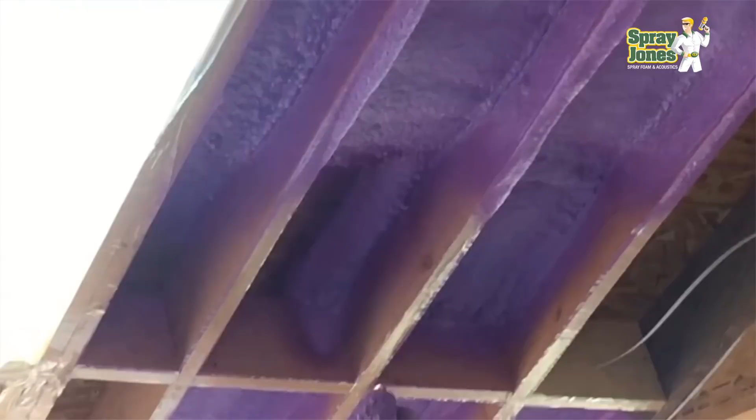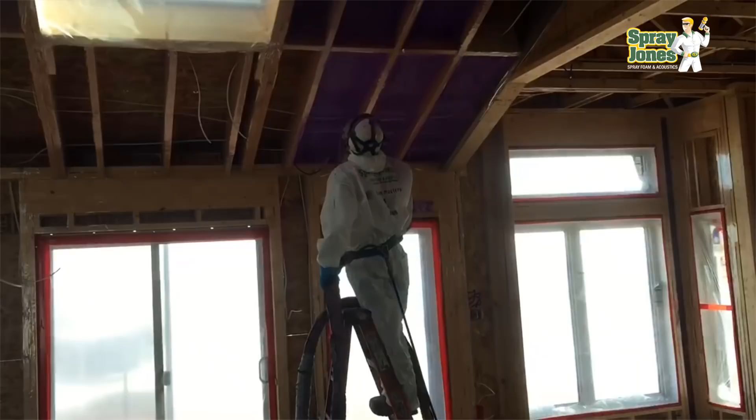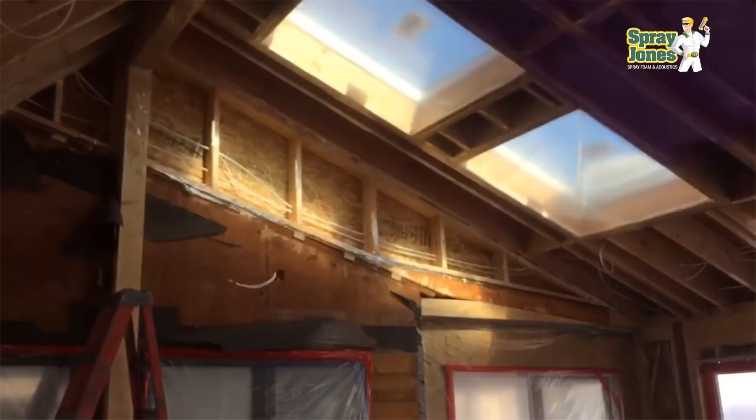So that's what we're here to discuss, and I'll show you as we get deeper and deeper into other products and how foam behaves as to why I'm so convinced that spray polyurethane foam insulation is as modern as tomorrow, and I don't think in my lifetime anything's going to come up that can top what it can do and why. So thank you for tuning in. Let's get into the information.

This information I'm presenting is nothing new. There's a number of other good channels that have engineering and architectural information, and they go over in quite lengthy detail the R value test, so I'm not saying anything new. This has been already described before, and Belinda Carr on her architectural products channel does a very good job and very good video illustration of the R value test, but I'm going to put the Spray Jones sort of spin on it.

So we are dealing with an ASTM C518 test that is conducted at 75 degrees Fahrenheit. And to just cut to how this test is done, let's read what it says on this site here, the test procedure. This test uses a heat flow meter apparatus. The heat flow meter consists of a cold plate and a hot plate, which incorporate heat flux transducers for measuring heat flow. The material to be measured is placed between two plates, which are controlled to different temperatures to create a heat flow from hot to cold plate, which is measured by transducers.

The device is calibrated against materials of known thermal conductivity and can be used to measure flat materials in a wide range of thicknesses and conductivity. Tests are commonly performed with a mean temperature between 35 degrees Fahrenheit and 110 Fahrenheit, with the most common being 75 degrees Fahrenheit. A temperature difference of 40 to 50 degrees Fahrenheit is commonly used. The end result, thermal conductivity or K value and thermal resistance, hence R value, are determined.

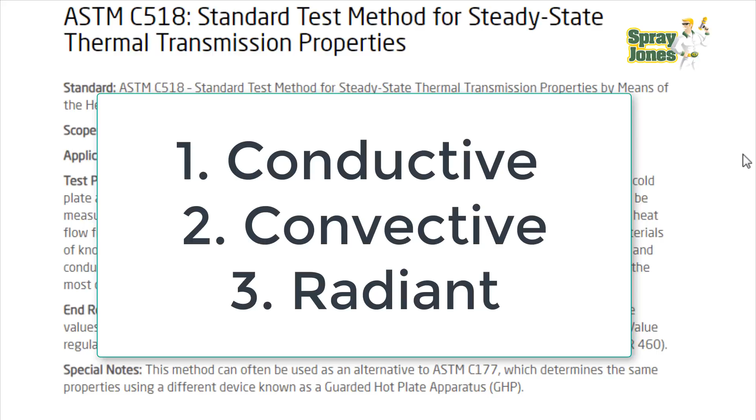If you are going to measure heat loss through conductivity, it needs to be noted here there's three types of heat loss, right? There is conductive, there's convective, and there's radiant. So conductivity is heat loss through touching. So if you are going to set up a test in which you want to measure your insulation's ability to resist conduction, you're not going to want any interference with air movement, which is convection, or radiant values, right? Because that would skew the results.

So you're going to measure one third of the equation, if you can think of it that way, which is what the ASTM C518 test is doing. It's measuring one third of a three-part equation. The problem with that test is if you want your product to fare the best, you have to make sure that it's not going to have any markers that are going to throw it off.

No air movement and no water movement. So the test would be set up that the box would be dry, which it is, 0 water, 0 humidity level, and 0 air movement. So are you starting to see that there's a problem? I mean, if we want to get a pure test on thermal conductivity and resistance value, we're doing the right thing. The problem is we're leaving out 2/3 of the equation in real life.

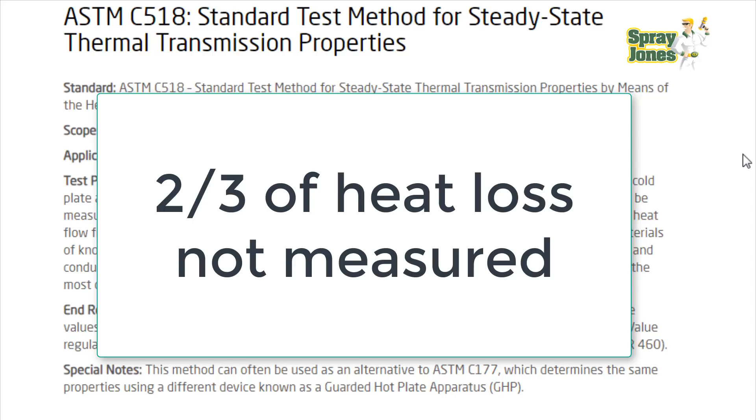So insider information. Everybody wants inside. I believe that you need to take a very good look at what they're trying to accomplish with the test, because there's some very important things that we need to note that's going to have a huge bearing on the decisions that we make. The first is that most samples going into the C518 test are going to be kept at a 1-inch value.

Now, this is the little bit of the conspiracy theorist in me. The fibrous industry, when this test was developed, no input was brought in for other materials. Frankly, a lot of other materials weren't on the market. Fiberglass goes back all the way to 1932, and if you're going to be testing any combination of an open cell fibrous material, whether it's cellulose, mineral fiber, glass fiber, any type of fiber, hay, straw, newspapers, take your pick, you're going to want to minimize the amount of convective loop that you can get inside the material.

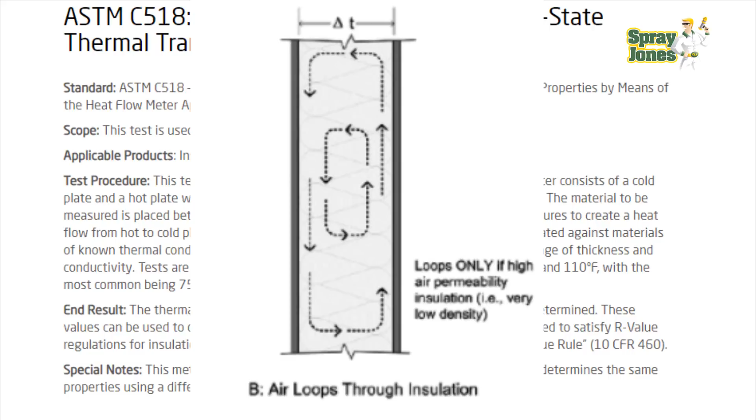So 1/2 inch is going to be too little, 1 inch sounds good, 2 and 3 inches is going to be too thick. If you actually take the insulation material in an open cell fibrous format beyond 1 inch, it doesn't fare as well, because you're going to get more convective loop within the material and it's going to throw out the results. So the optimal result to measure is going to be the 1-inch sample. So that's the first thing that skews our results.

So you're dripping. The sponge becomes saturated, and eventually we reach a point that for every drip that touches the top, 1 drip has to go out the bottom at the drain. We've now reached steady state. And this is when the test begins. There has to be a measurable loss so we can see how conductive our insulation is and how much resistance. If we're giving so much heat or energy here, but only getting so much heat and energy out of the bottom, then we actually have something we can measure.

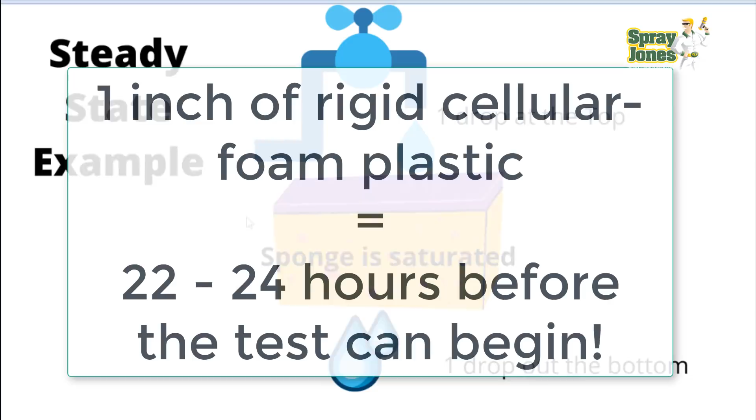Well, what does it take to get through 1 inch of polyurethane foam or 1 inch of EPS? 22 hours. 22 hours minimum. So that's not factored into your insulation equation. So the test is, again, measuring no air movement, no moisture movement.

We have a 1 inch sample so that the fibrous products fare the best as far as internal convective loops throwing off and skewing the results. And the fourth point, we don't start the test until we reach steady state, and steady state data does not factor into our decision.

We only want to measure what the loss value is once we start to get a loss value. So for expanded polystyrene and cork and any type of cellular plastic product that has some sort of gas trapped in the cells, the data is going to be completely different as to how well it's actually working for an insulation, because the test isn't set up to take any of that data into account. So are you starting to see just how rigged this is? This has already moved our needle so far over that to base our decisions on this one test is really going to throw us off.

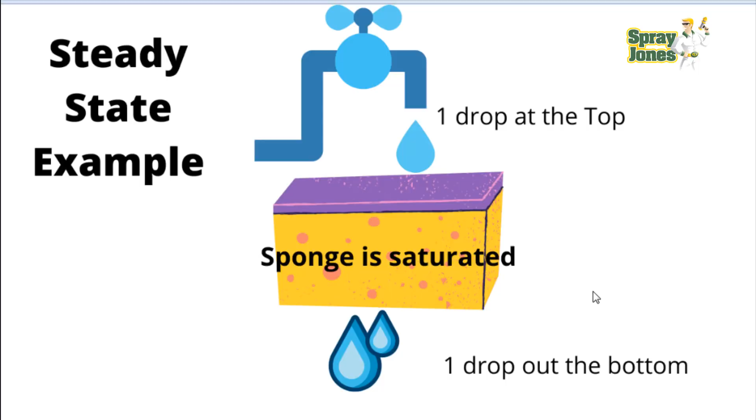So now we're going to get into studying a little bit more on this R value test, conductivity test, and getting into a lot more anecdotal evidence. But let's just pause for a minute and think about the 3 mechanisms of heat loss: conductive, convective, and radiant. So far, this test is only measuring one type.

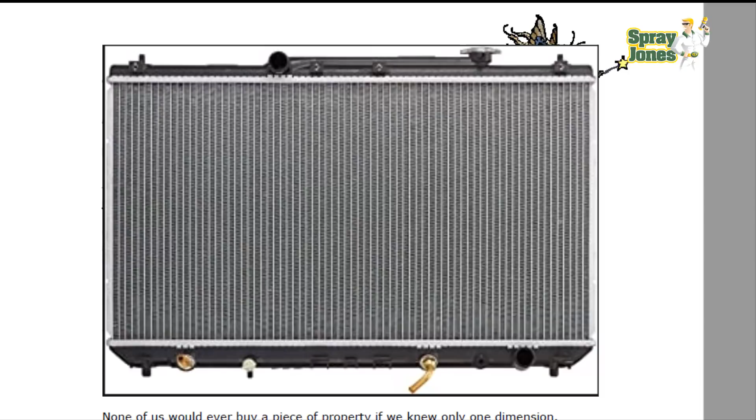Think about a simple thing that we all have if we're driving a vehicle, a radiator in our car. Think about the fact that the radiator is using all 3 mechanisms of heat loss to cool down the coolant which is circulating through the engine block. You have got conductivity in the form of many, many pipes inside the radiator, which is maximizing the surface area, and then fins that go through those pipes to maximize surface area so that there can be maximum conductivity surface area.

We then drive air through the radiator, which is convective, to pick up the radiating heat across the conductive surfaces to cool the entire and transfer the heat from high source to low source, which is going to be the air. The air and the radiant values are dissipating the heat, dissipating the energy. All 3 mechanisms of heat transfer or heat loss are working in a car's radiator.

Now imagine, if you will, that we only would take into account conductive value. Imagine that we took the air out of your radiator. Everybody has had a vehicle at some point overheat that has had the rad plugged, right? You've had dust, dirt, grime in the radiator, and you can't get enough airflow, or the fan quits, or the fan belt quits. Well, how is it that airflow all of a sudden in that radiator shuts you down? Well, massive amount of heat transfer due to the convection. And that's exactly where we're going now, is to understand what is happening in our buildings.

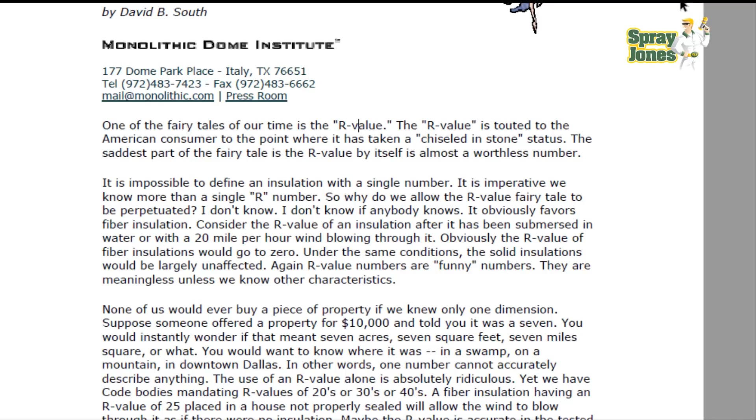One of the fairy tales of our time is the R value. The R value is touted to the American consumer to the point where it has taken a chiseled in stone status. The saddest part of the R fairy tale is the value itself is almost worthless. It is impossible to define an insulation with a single number. It is imperative that we know more than a single R number. So why do we allow the R value fairy tale to be perpetuated? I don't know, if anybody knows. It obviously favors fiber insulation.

Consider the R value of an insulation after it has been submerged in water or with a 20 mile per hour wind blowing through it. Obviously, the R value of fiber insulations would go to 0. Under the same conditions, the solid insulations would be largely unaffected. Again, R value numbers are funny numbers. They are meaningless unless we know other characteristics.

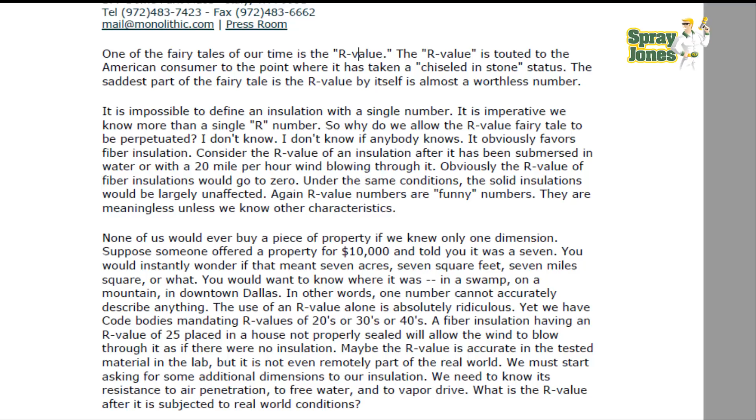Test to determine R value. We've taken a look at this. The test used to produce the K value is an ASTM test. The ASTM test was designed by a committee to give us measurement values that hopefully would be meaningful. A major part of the problem lies in the design of the test.

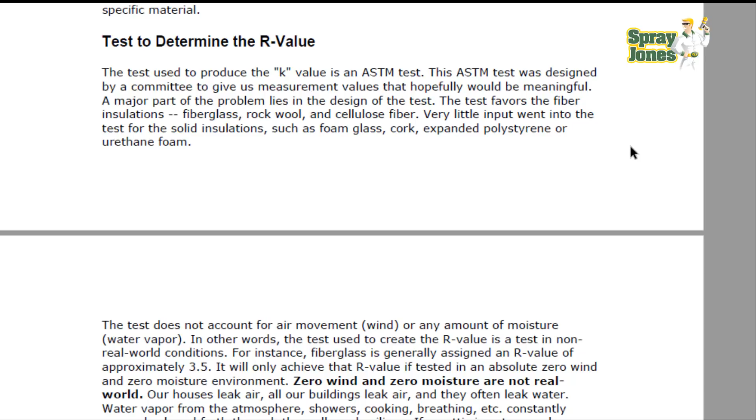The test favors the fiber insulations: fiberglass, rock wool, cellulose fiber. Very little input went into the test for the solid insulations such as foam glass, cork, expanded polystyrene, and urethane foam. The test does not account for air movement, wind, or any amount of moisture, water vapor. In other words, the test used to create the R value is a test of non-real world conditions.

Now, I've said it before, to be fair, if you want to test only for conductivity, the test is set up correctly. All right? That I will give them. But we just cannot allow that one test to factor into our energy codes. But it has.

For instance, fiberglass is generally assigned an R value of approximately 3.5 per inch. He's talking per inch in the sample, which, by the way, an empty air cavity will achieve. It will only achieve that R value if tested in absolute zero wind and zero moisture movement. Zero wind and zero moisture movement are not real world. Our houses leak air, our buildings leak air, and they often leak water.

Water vapor from the atmosphere, showers, cooking, breathing, etc. constantly moves back and forth through the walls and ceilings. If an attic is not properly ventilated, the water vapor from inside the house will very quickly semi-saturate the insulation above the ceiling. Even small amounts of moisture will cause a dramatic drop in fiber insulation's R values, as much as 50% or more.

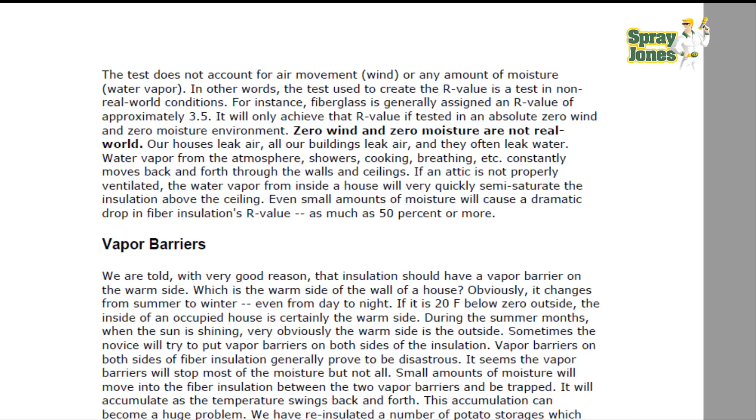Moving a little bit further down in his report here, we understand air penetration through the wall of a house. In some homes, when the wind blows, we often can feel it. But what most people, including many engineers, do not realize is that there are very serious convection currents that occur within the fiber insulations. These convection currents rotate vast amounts of air. The air currents are not fast enough to feel or even measure with any but the most sensitive instruments.

Nevertheless, the air is constantly carrying heat from the underside of the pile of fibers to the top side, letting it escape. If we seal off the air movement, we generally seal in water vapor. The additional water often will condense. This now becomes a source of water for rotting of the structure. The water as a vapor or condensation will seriously decrease the insulation value, the R value. The only way to deal with a fiber insulation is to ventilate. But to ventilate means moving air, which also decreases the R value.

This is going to be huge because the next set of 4 videos coming out is going to be all to do with ventilation, attics, cathedral ceilings, cathedral attics, and spray foam insulation, moving away from old-fashioned methods and what had to be, to new methods and what can be and should be done. I want to say this with what he's just said.

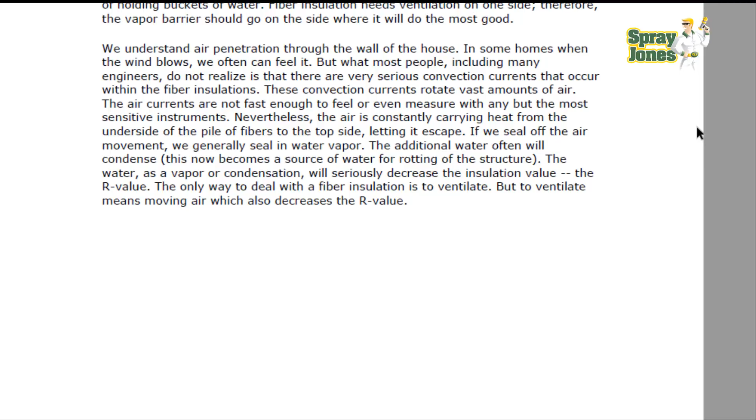Here's a good example that he gives of the attic insulation and the amount of cold, dense air and the warmer air flowing through. We saw this in the study that I showed earlier on flash and batt 2. I brought up the Oak Ridge National Labs attic study, where they started to see just how much cold air was flowing through the attic.

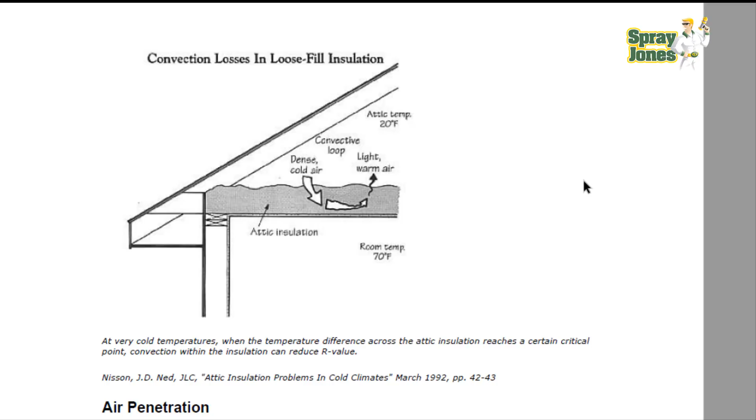Do you understand why attics are done with R40 and R50? It's to make up for this. It's to make up for the amount of cold, dense air that's going through the first 6 to 8 inches of loose fill or batted insulation. You're trying to put more and more insulation between you and the cold side to make up for the air leakage. Shocking.

So we're seeing that air movement through our insulation and water movement through our insulation is hugely detrimental to the insulating ability. So here he states, the only commonly used solid insulation that absolutely protects itself from air infiltration is the spray-in-place polyurethane. When it is properly placed between 2 studs or against the concrete block wall or whatever, the bonding of the spray foam plus the expansion of the material in place will effect a total seal. This total seal is almost impossible to overestimate.

In my opinion, most of the heat loss in the walls of a home have to do with the seal rather than the insulation. Then somebody already made a comment of this, waiting for this video to come out. They think that the air seal is almost more important than the R value. You are correct. In fact, most people cannot understand why we can blow the doors off heating loads with only 1 inch of foam. According to the R value test, we don't have hardly anything there. It's the air seal.

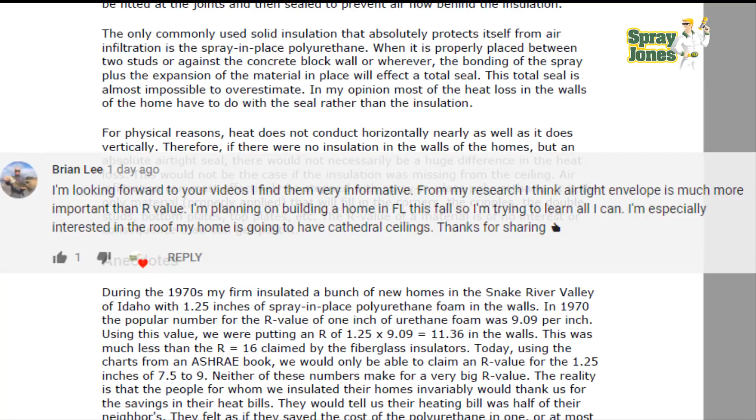For physical reasons, heat does not conduct horizontally nearly as well as it does vertically. Therefore, if there were no insulation in the walls of the homes, but an absolute airtight seal, there would not necessarily be a huge difference in the heating loss. This would not be the case if the insulation was missing from the ceiling.

Air infiltration can most effectively be stopped with spray-in-place polyurethane. It is the only material properly applied that will fill in the corners, the cripples, the double studs, top and bottom plates, etc. The R value of the material is of no interest or consequence if air can get past it. Agreed.

So, having absolutely no way of having your batt insulation airtight to the inside, not to the outside, in a flash and batt situation, you are throwing your money away. The polyurethane foam is what's providing the insulation and protection to your home. The batt insulation is just feel-good information. It's not really actually doing anything there.

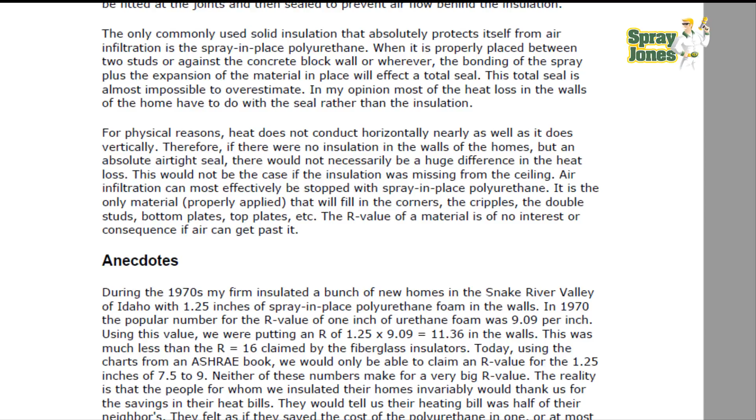Okay, anecdotes. During the 1970s, my firm insulated a bunch of new homes in Snake River Valley of Idaho with 1.25, that's 1¼ inches of spray-in-place polyurethane foam in the walls. In 1970, the most popular number for the R value of 1 inch of urethane foam was 9.09. Do you know why that is? This is a blowing agent.

Before the green environmentalists got a hold of us, we were able to put better chemicals in the product that were amazing insulators. It's only taken them 30 years to make us physically double the amount of material that we have to put into a wall to get the same as what we were getting 30 years ago. That's a whole nother subject.

Using this value, we were putting an R of 1.25 times 9.09 equals 11.36 in the walls. This was much less than the R16 claimed by the fiberglass insulators. Today, using the charts from the ASHRAE book, we would only be able to claim an R value of the 1.25 inches of 7.5 to 9. That's total value, okay? So 1.25 inch, he could only claim somewhere between 7.5 to a total value of 9. Neither of these numbers make for very big R values.

The reality is that people for whom we insulated their homes invariably would thank us for the savings in their heat bills. They would tell us their heating bill was half of their neighbors.

They felt as if they saved the cost of the polyurethane foam in 1 or at most 2 years. This is anecdotal evidence, I know, but anecdotal evidence is also compelling and very real in our world. Most of these customers were savvy people. They would not have paid the extra to get the urethane insulation if it had not been better. So

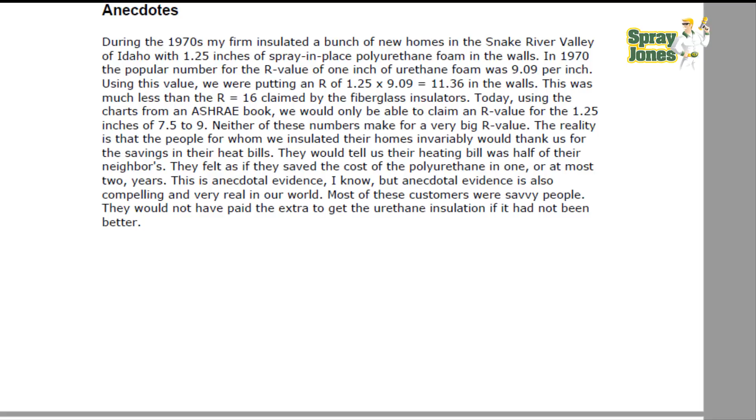how is this possible? How is it possible that we are putting in an R7 or an R9 of spray polyurethane foam in a 2x4 wall, and the heating bills are half as much as in the house receiving the R16 batt? Obviously, the R values are not equal. Obviously, the fiberglass is not giving us a true value. Back to my article: insulation innovation holds promise for true efficiency.

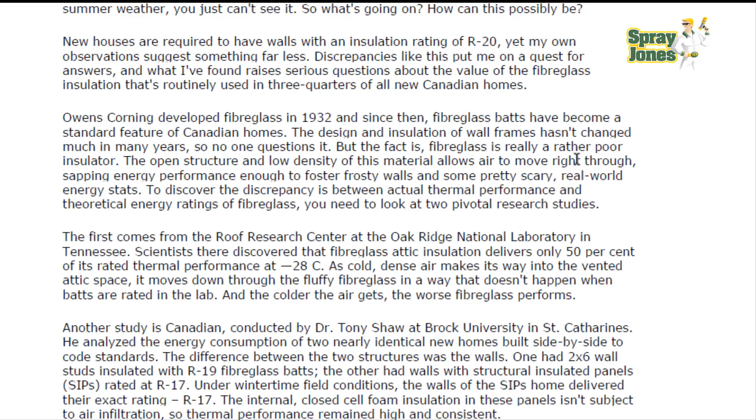So we've already seen this before. I showed this in the flash and batt video. If you want to check it out a little bit more, we're not going to read all of it. We're just going to scroll down here. They built two identical houses, right? Another study is Canadian, conducted by Dr. Tony Shaw of Brock University in St. Catharines. He analyzed the energy consumption of two nearly identical homes built side by side to code standards.

The difference between the two structures was the walls. One had 2x6 wall studs with R19 fiberglass batts. The other had structural insulated panels, or SIPs, rated to R17. So all right, we're underneath. We're R17 to R19. Under wintertime field conditions, the walls of the SIPs home delivered their exact rating of R17. The internal closed cell foam insulation in these panels isn't subject to air infiltration, so thermal performance remained high and

consistent. The walls of the fiberglass insulated stud frame home, on the other hand, performed at an actual level of only R4, because of the inevitable air movement within the hollow wall cavities. Hard to believe, but true. And then he goes on to say you can put all the building wrap, siding, and materials that you want on the outside of the house. The air still wafts through the wall cavities, carrying the energy with it. In the Brock study, the code-built home lost more than 60% more energy than the SIPs panels.

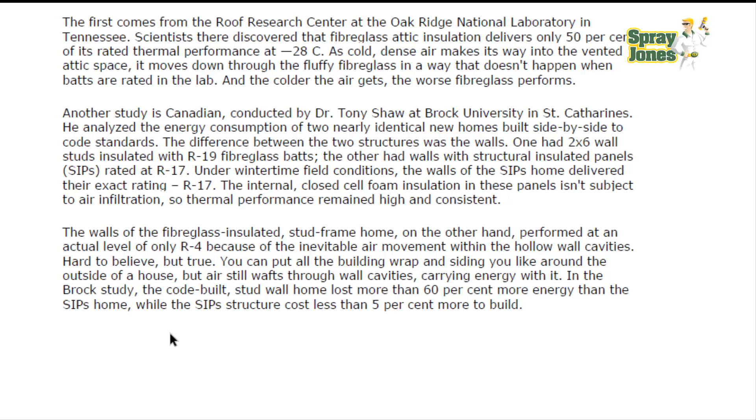All right, what are we saying here? We are saying that the R values are not equal. We're seeing the information in the field. Now, I want you to understand something about the other part of the C518 test. It's a 1-inch sample, but it fits on all four sides. It fits perfectly into the box. It fits perfectly to the lower heat plate and the top plate. There's absolutely no gaps around it or on top of it. So that, again, is the fifth point of not realistic.

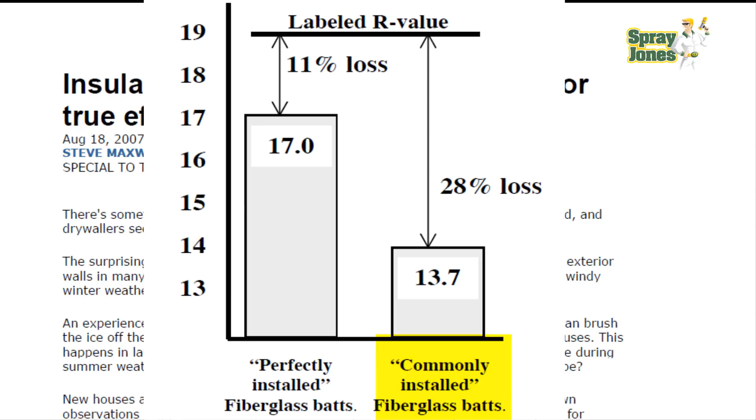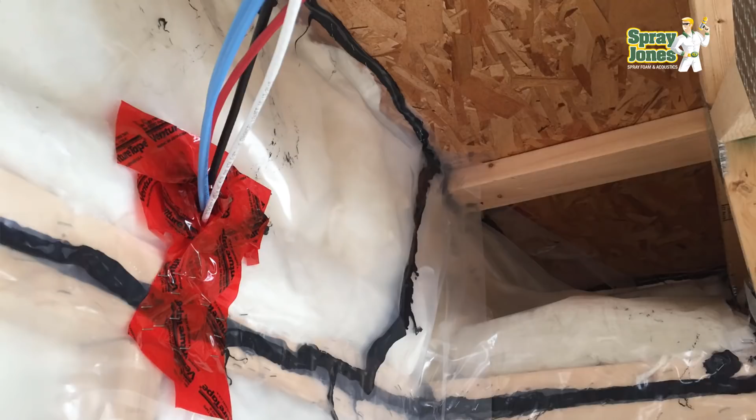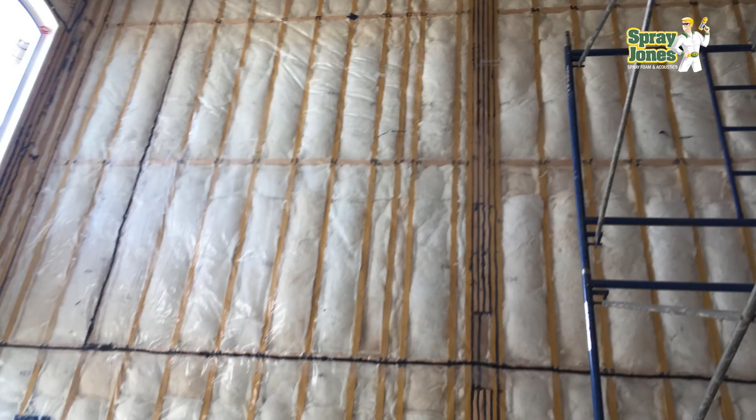Now, again, if you're just wanting a hyper-accurate test for thermal conductivity, we've got it. But don't take the conductivity test without convection, without radiant, without moisture movement, and then say that that's our total assessment for insulating values, right? Now, this favors the fiberglass industry, because they can claim that they've got R20, R30 and 40. The test is slanted. Our football team, the spray foam and foam insulation of any kind, cellular, EPS, it doesn't matter. We show up and they've already got 20 points on the board. We have to overcome a 20-point deficit.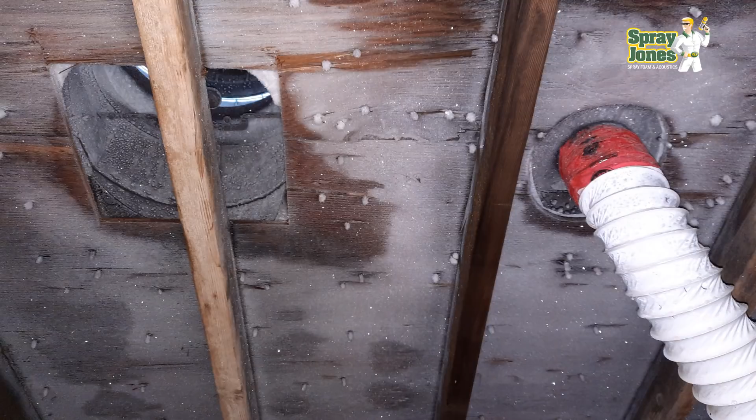What's the 20-point deficit? It takes 22 hours before we can start the test. It takes them 4. In the real world, that factors in. In the real world, the house cools down quicker. The house loses heat quicker. It gains heat quicker, or slower, right? 22 hours of thermal steady state matter. It matters hugely, but it doesn't factor into these prescriptive results that the codes are going to be based on.

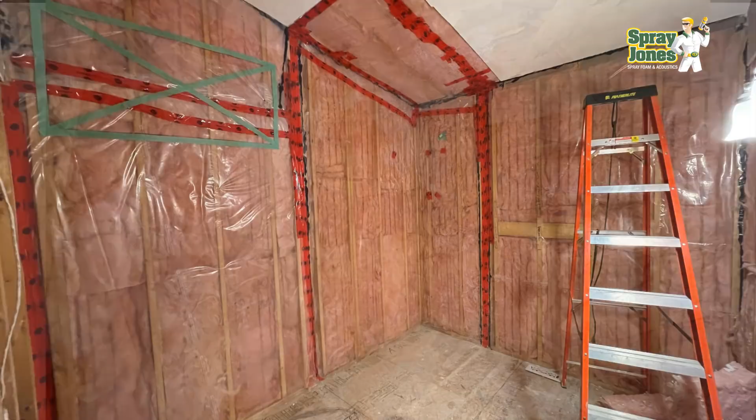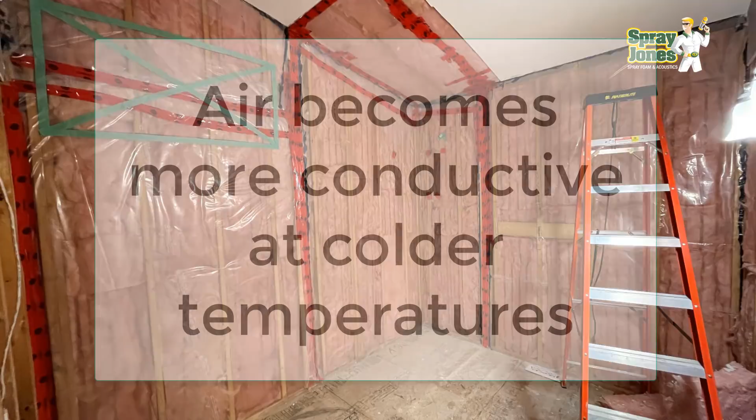So, water is going to affect the insulation. You've got damp and wet insulation, either from a 60% or 80% relative humidity outside, that's going to affect your insulation value. High humidity from the inside, that's going to affect your insulation value on open cell fibers. How it's fitted into the wall or the roof is going to factor in. How much air is traveling through it or not, and what temperature that air is. Because let's be honest now, here's the sixth point. Okay, air becomes much more conductive at super cold temperatures. And that's just physics, folks.

That's because the air molecules are becoming closer together, because the air is becoming more dense. Therefore, the molecules come closer together. When they become closer together, the conductivity rises. So you actually become less insulative, or the conductivity goes higher and your resistance value goes lower when you get into extreme low temperatures.

So we need an insulation that is not going to let air go through it, water go through it. We need it to be a tight fit to all four sides or six sides of whatever we're insulating. We need whatever insulation medium gas that we're using. If we're going to use air to insulate, well then okay. But if it's open and susceptible to the air changing humidity level or temperature, then the gas, the air, the oxygen, whatever we're using is going to be less conductive or more conductive.

So if we truly want to be isolated, if we truly want to be insulated, we need to be bonded, we need to stop the air, we need to stop the water, and we need some sort of a gas trapped inside our medium material that isn't going to fluctuate and change its insulating value at extreme temperatures. Do you see where this is going? Do you see why I'm so biased towards polyurethane foam? Because only polyurethane foam fits into this the easiest.

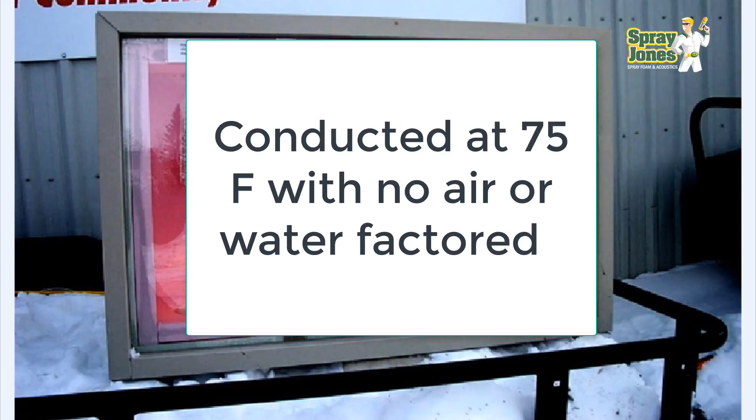Now let's wrap things up. Okay, we're going to close with this. To recap, the problem with solely using the ASTM test as our insulation standard for measuring energy codes and insulation codes is the following. 1, it's conducted at 75 degrees Fahrenheit with no air and no water incorporated into the test, which is fine for purity of a test, but not for real world.

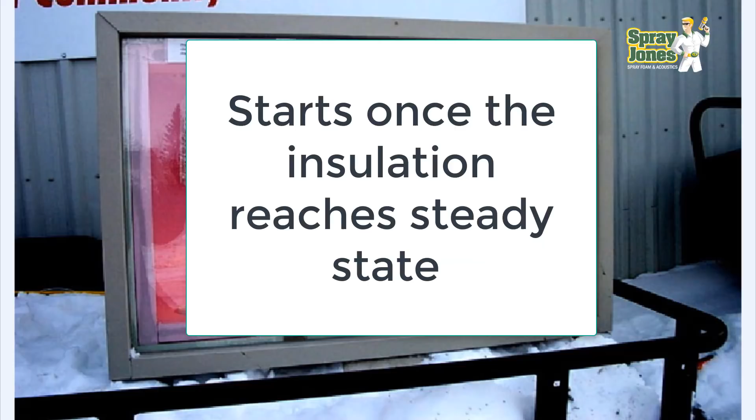2, it starts when the insulation reaches steady state. That's not factored in. Therefore, spray foam is going to take 22 hours. Foam insulation is 22 hours. Fibrous only 4 hours. Therefore, the fibrous isn't doing as well as other insulations. 3, it measures conductivity as the primary purpose of the test. So the 2 other mechanisms of heat loss are not being factored into our energy codes.

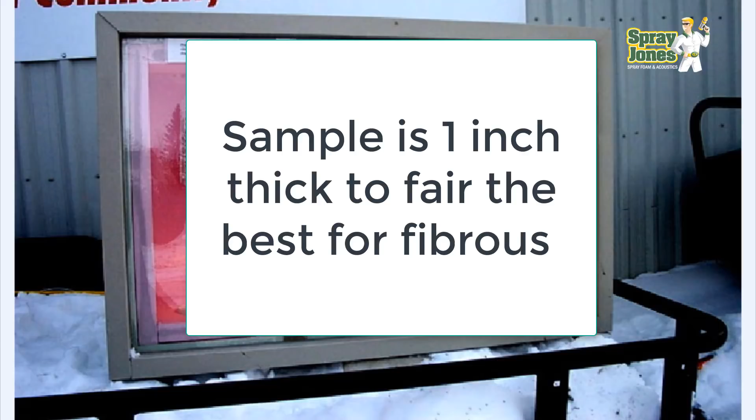4, the sample in the ASTM test is usually done at 1 inch thick, no thicker and no thinner. That favors the fibrous industry the most. 5, the sample is a perfect fit on all 4 sides, actually 6 sides, top, bottom, left, right, front and back. 6, we know that air changes its thermal conductivity abilities based on high and low temperatures. It becomes much, much more conductive at low temperatures, and it changes its conductivity and effectiveness with up and down water levels. Those are 6 body blows to tell you that the ASTM R-value test is basically useless as an insulation gauge for thermal effectiveness.

And I will not tolerate R-value discussions with somebody long term when we're choosing what we're going to do with spray foam. And codes have to change. Except I'm going to say this. We are fighting a multi-billion-dollar industry in the fibers that is going to have to be forced to change its ways because they are going to lose market share and stock price. The day that these codes are changed to reflect something other than pure R value, we've won and they've lost, and they know it. So they are going to fight us tooth and nail.

All right, closing with this picture. All right, what are we seeing here? This was done by a friend of mine that ran a co-op home center. And he constructed this box because he sells rigid extruded polystyrene, foil reflective bubble wrap, and this was all the rage for a while. This was a foil-backed product called P2000. This is an expanded polystyrene, and every one of these products claims a different R value.

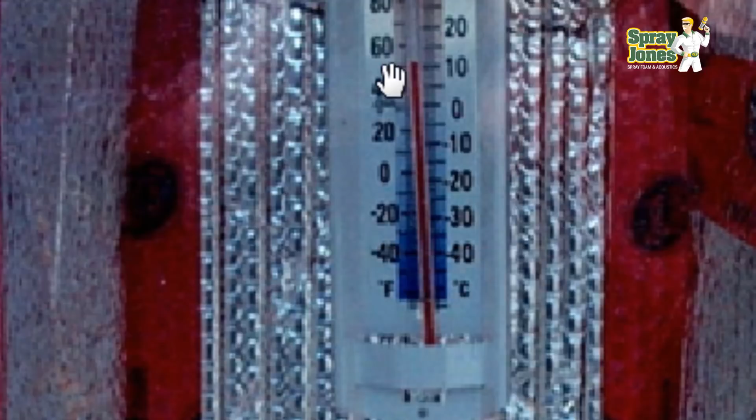Here is the EPS at 5/8 of an inch thick. It's foil face to the outside. And where this is 0 Celsius here, 32 on the Fahrenheit scale, he's sitting 4 degrees Celsius, right? And again, this product's claiming like an R19. And then the foil reflective bubble wrap. I'll zoom in here and see if we can get just a little bit closer. Yeah, we're sitting maybe 11 degrees centigrade, well below the 60. We're in the 50s somewhere. And this is claiming the R9 on the foil reflectives.

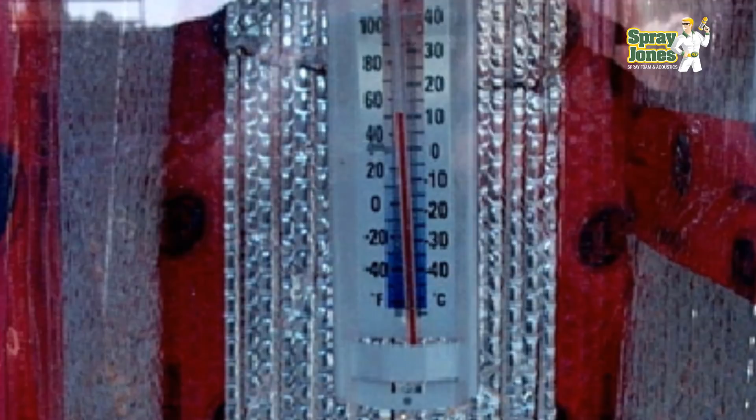So I'm going to ask you, who's telling the truth? Who is actually giving the R10? And it's not hard to figure it out. It's the box on the left, the extruded polystyrene. And this is showing you how a closed cell foam... Well, yeah, let's talk about that. Let's talk about what these products are using.

Here we have an extruded polystyrene, and the most common blowing agent they used to use was cyclopentane, which would be a derivative, a cousin of butane. It would puff the mixture up and then force the mixture through a Play-Doh type mold, like kids have for Play-Doh. And that's how it would extrude it and put that seam, that lip on the edge. The bubble wrap is air insulated in the little bubble packs. It's just CO2. And same thing with the expanded polystyrene. It's going to be carbon dioxide or steam blown EPS, which is just a simple plastic, so it's steam blown.

Now, each of these are performing fairly well given the outside climatic conditions, but only one is giving you true efficiency on the inside. And the point that we're trying to make with all of this is that R-values do not perform the same for each product. Each of these products claims a different R-value or similar R-value, but have very different methods. So you want to use a closed cell product that has an inert gas trapped in the cells of the foam, and that is going to give you the true thermal performance with air movement, moisture movement, extreme highs, extreme lows, as you can see in this display.

So I think we have proven, I mean, we could go on and on, but this video is long enough as it is, and there's probably only 2 people watching at this point. If you have, thank you very much. You're the 2 diehard fans.

I can go on for a great length of time after this on more on the R-values and compare batt to foam, but I think the point has been made. The test is only measuring one type of real heat loss, and it's taking no account for other factors. And therefore, it cannot be used as the sole decider in your insulation values. Yet, the codes are written that way. And what does that mean? It means right now we're in a headlock to try and wake an industry up, wake people up, and change some building codes. But we're going to have to face a giant, so get your rock and your sling and get ready, because we're going to have to take down Goliath, which has been ruling this land for quite some time.